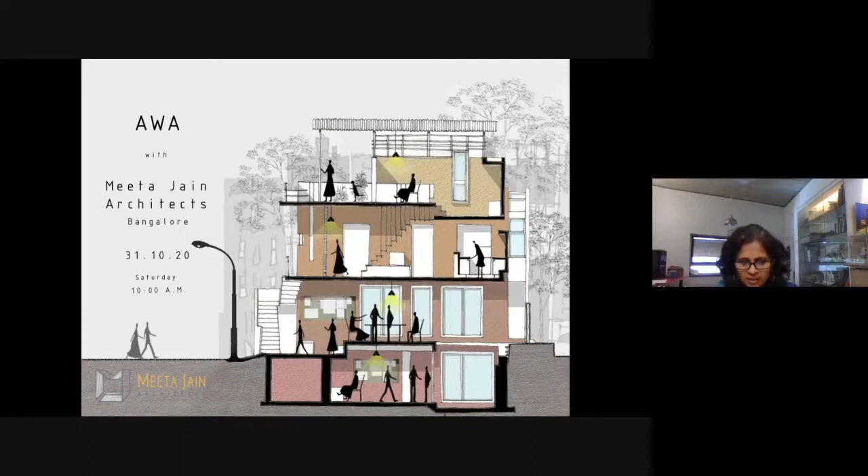Some of the driving questions for us in the practice, I think, have been about how inclusive can the spaces be, more than the materialistic or stylistic aspects. At the heart of it is how can whatever we design, create or organize allow people to meet more than they are intended to, more than is deliberately required? How can we increase chance encounters within the organization and also of the building and the outside world? The idea of architecture being a vessel of energy exchange between humans is an aspect that continues to fascinate us.

This quote by Khalil Gibran, 'Let your home be a mast and not an anchor,' pretty much expresses the spirit of what this home aspires to be. I feel a lot of deep gratitude to have had this opportunity to design a home which life presented to me, which is almost like a dream space, where really one's spirit has not felt anchored or held, but has been an amazing space of exploration — open to family, friends, extended family, guests — where I've met actually the most amazing people. So in that sense, it's really worked as a mast.

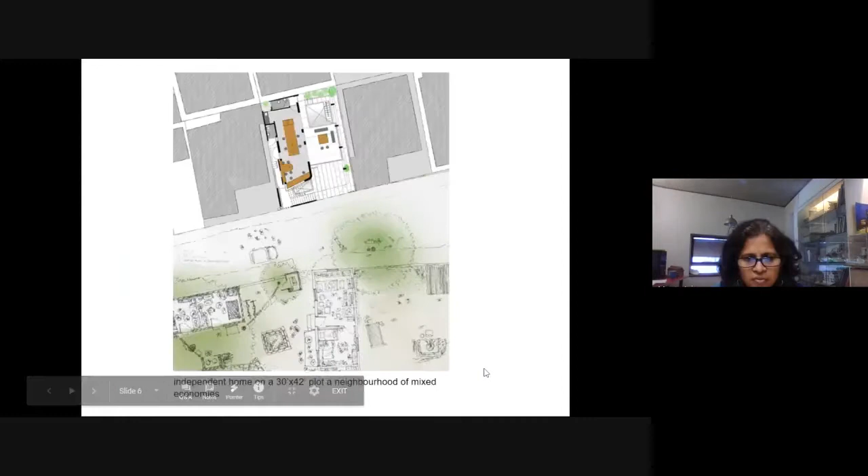The facade is modulating in nature, like the front facade by the use of louvers. And then, of course, the finished versus unfinished in terms of interior surfaces is also at play.

Now, coming to the neighborhood, right opposite the site there is a little community of vendors, which is actually a disputed property, so the owner has let it out to a vendor community. I really call it a neighborhood of mixed economies, a middle class or low middle class kind of neighborhood, which actually makes it a very interesting site in many ways in the urban context.

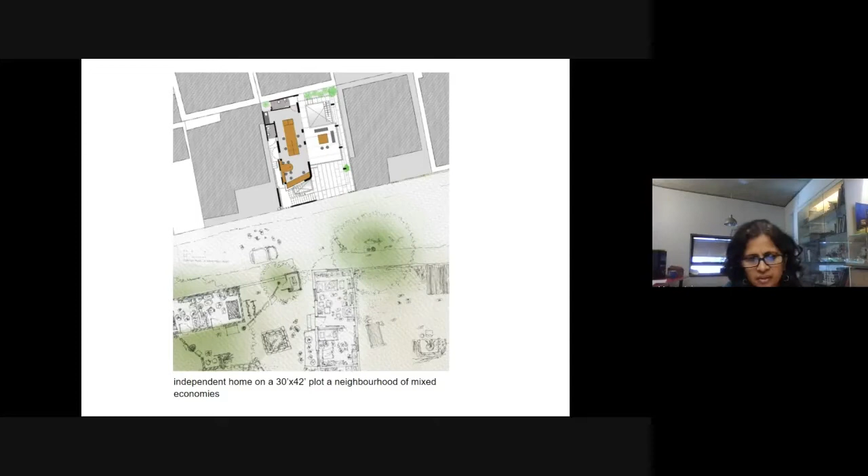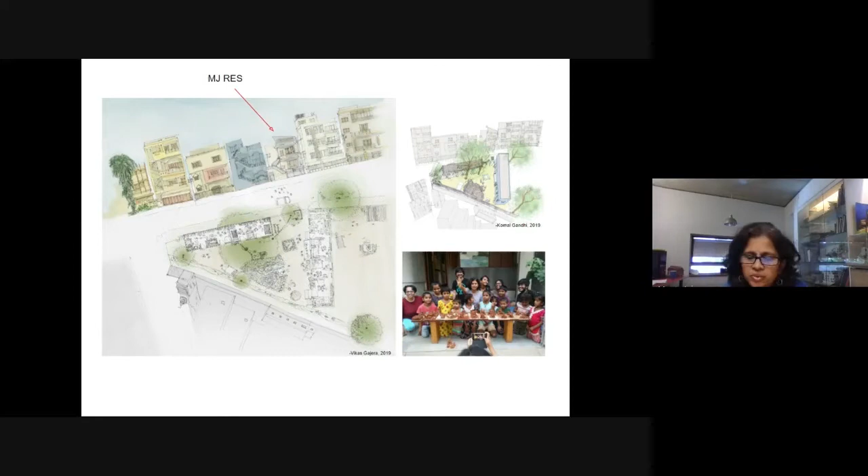These beautiful drawings were done by two interns, Komal and Vikas from CEPT, who were here last year. As the picture shows, there is also this aspiration to engage with the children of the neighborhood, whose gate is right opposite ours. So this is a little Ganesha which was made with these children; the gates were open, so we used the front yard, and a lot of these children are Muslim children, and it was just interesting to see how there are absolutely no boundaries when interacting with children. So you will also see me constantly talking about the use and imagination of spaces along with architecture, because that forms an integral part of our work.

The other thing which consciously dominated the crafting of this building was how ungated and open the facade could feel in a neighborhood which is gated, as you can see in the buildings on the left and right with their obsession with grills and more grills, where security concerns dominate.

Whereas in this building, we chose actually not to have any grill in the front, because my view is that the thief never comes from the front. But at the upper levels, we do have grills where there are possible places to hide.

So essentially, at the form level, it's a pavilion and a box, a duality. And the same duality is expressed across all levels, as you can see. There's a basement, which is the largest space, where you can see these two columns.

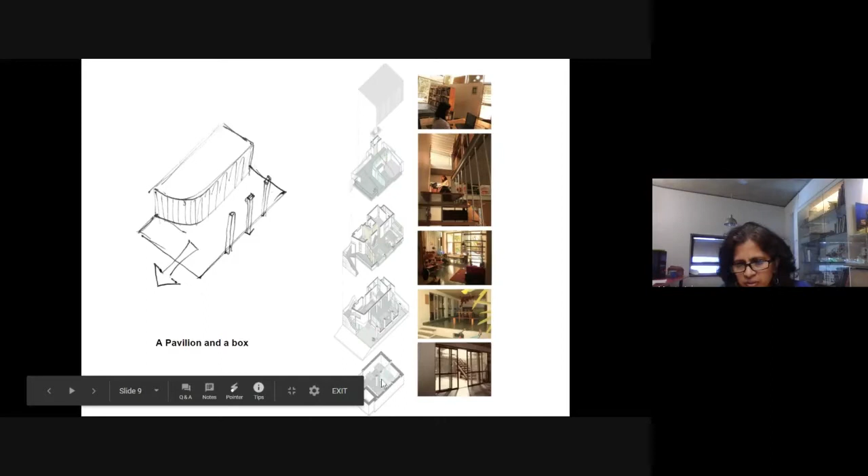And then at the ground level plane, it is completely open, and the box is towards the left side. The same thing continues at the first floor level, and at the second floor level it reverses. The pavilion stands out in the terrace, so the box becomes a void there.

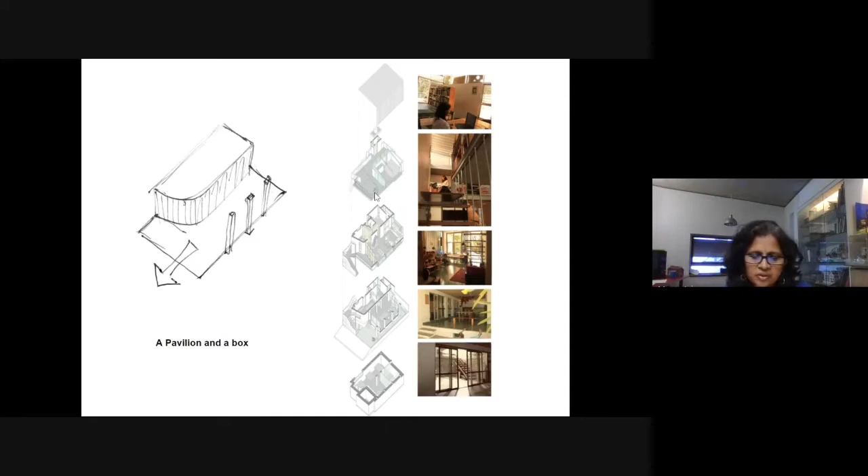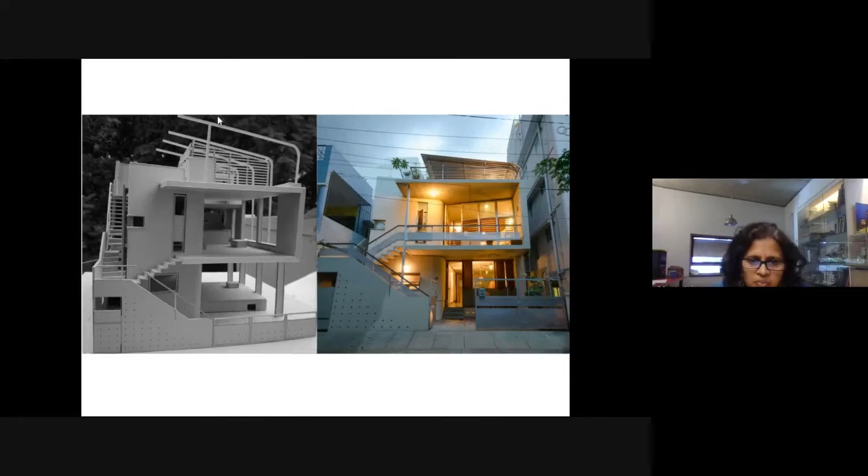As the model shows, the sheet roof, which is actually the secondary layer of the pavilion, comes from the top, takes a bend, and rises and falls in the living room space. This has been removed to show the pavilion-like nature of the model, and then just the columns continue down.

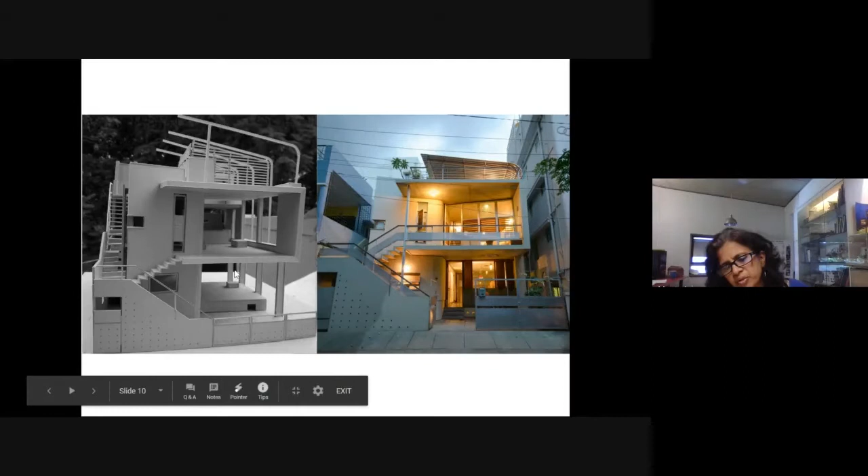This left side picture shows how the building was originally present. At the ground floor level, there was an open volume right from the beginning to the end of the site. Later on, this open space got built, and it's the present day office where this is a design office where we work out from.

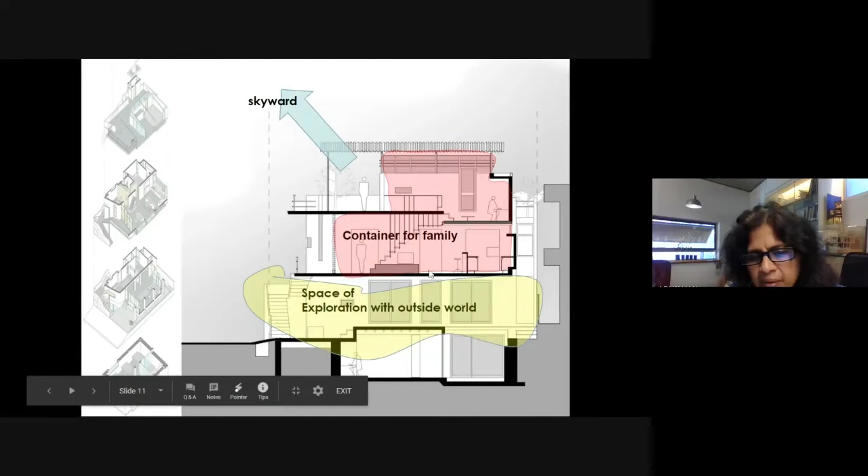Yeah, so this section explains the same thing. The bottom two floors are for exploration, and the upper floors are a container for the family, and there is a dominant skyward connect.

Having said that, I think the great shuffling of spaces happens because I have the privilege of working, both a privilege and a constraint of working. I've been a single parent, managing family and just multitasking. Earlier, my parents were here, both of them, and they passed on, so this really allows me to attend to everything very efficiently.

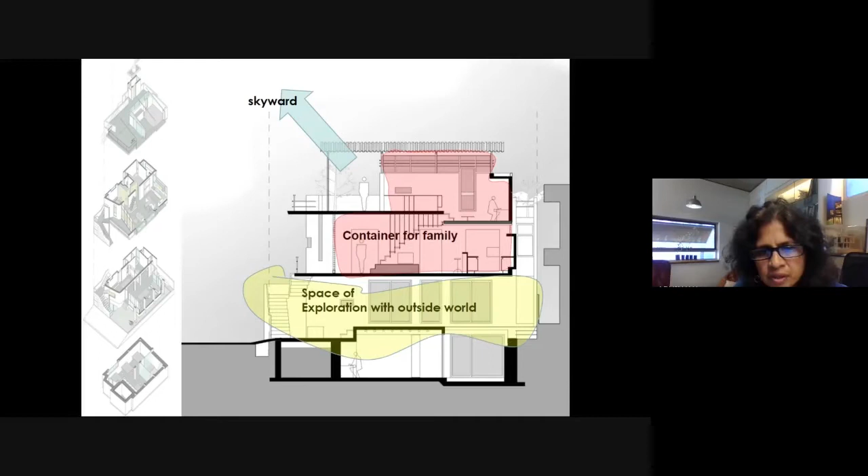So this ground floor is completely open, and only the box. The box is also kind of softened.

So the site was not a perfect rectangle, and what happened was that kind of oblique allowed for the staircase to fit in, and also gave rise to this angular wall, which at the upper level invites the user in. And what I want to point out here is also that the setbacks have been used cleverly in the sense of extensions with metals.

The top left corner was allowed by the bylaws to get occupied, so we've put in toilets there and staircases and little balconies. Even the living room projects out into the setback space, which allows for using a temporary material. So I said, okay, since I'm using the temporary material, a little bit fudging with the bylaws is okay.

As you see, the house totally orients to the east. There is no view to the side at all. And at the back, there are some openings through the kitchen. So the living and kitchen bay is one, and then there are two rooms here with a toilet in between. And then the third room is accessed through the staircase, and then a whole lot of terrace to be used.

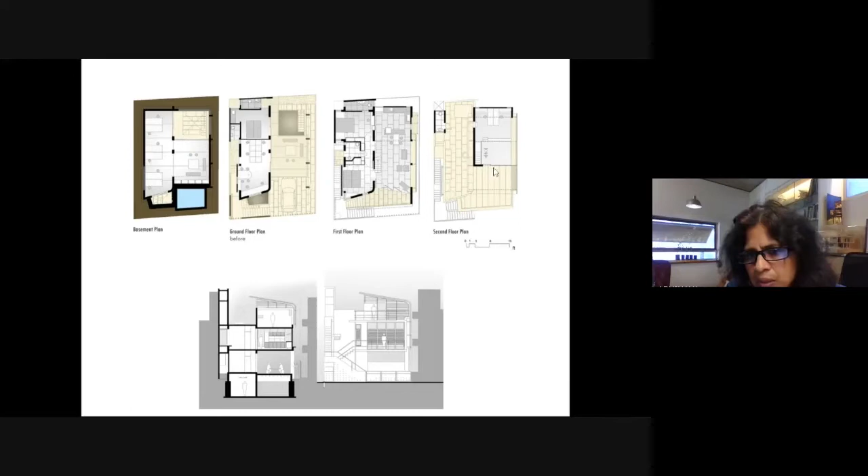So I began by putting the office here, which wasn't the original plan, so that I could just live between first floor and second floor and not need to go down and spread out myself. So the initial office was in the upper floor.

So as you can see, this picture shows when the office has moved down, but further I'll show you how it was earlier.

The compound wall becomes a very important element in most of our designs, where just by raising the wall and including the landing, a lot of—like below this wall, there is UPS and there are a lot of service areas at the same time. So how one can use each and every element effectively and tuck in things without wasting space.

And opaque and openness again. Also finding to what degree can one engage with the kids opposite, because once the gates are open, they just want to run in, and you want to engage, but at the same time, how do you draw balance? So sometimes we do engage them with these kind of activities.

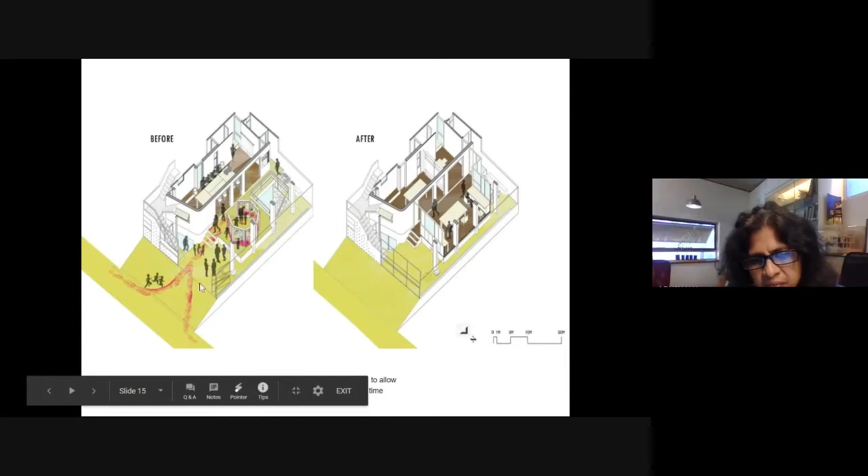And so I want to show you this thing, how the space changed. Earlier, it was the street came in, and we have used these spaces for exhibitions and many different activities. And then from there on, you could go down and access the basement through a courtyard. Subsequently, the space has got enclosed and become the present office where we are sitting right now.

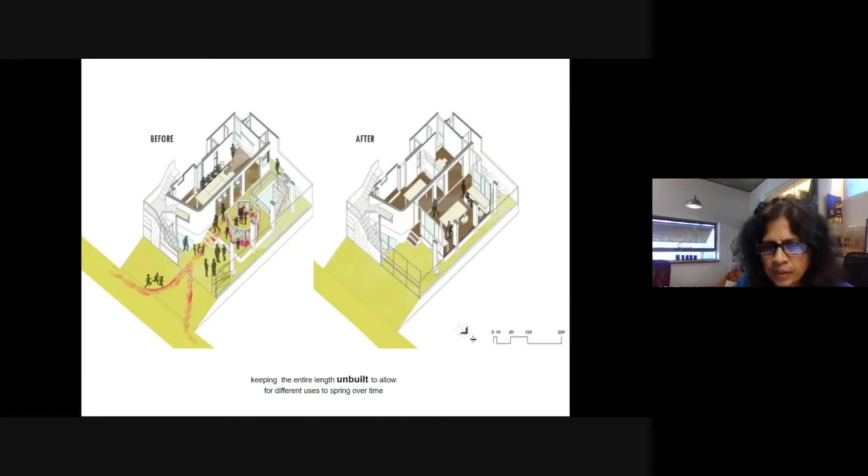The office space also expanded. So this is the earlier version, from 2008 when we built the house.

We had also run a shared co-working space called Protospace with another artist called Prayas Abhinav, who came up with this idea. So two floors, ground floor and basement, was functioning as Protospace. And of course, this kind of a play space. And sometimes we had this exhibition.

This was a very interesting exhibition we had on imagining a temporary space for Bangalore, designed as a temporary exhibition. Like it's a pop-up exhibition, and it's got this playful pivoting panels scaled to the height of a child, so that's another way of making the places inclusive.

So how can children be part of these kind of exhibition spaces? As you can see in these two images, how the space has changed from being open to enclosed, but somewhere the character of being the pavilion is retained by the way this enclosure is built. So on top, you can see the railing going towards the basement courtyard, and here you see the present design studio.

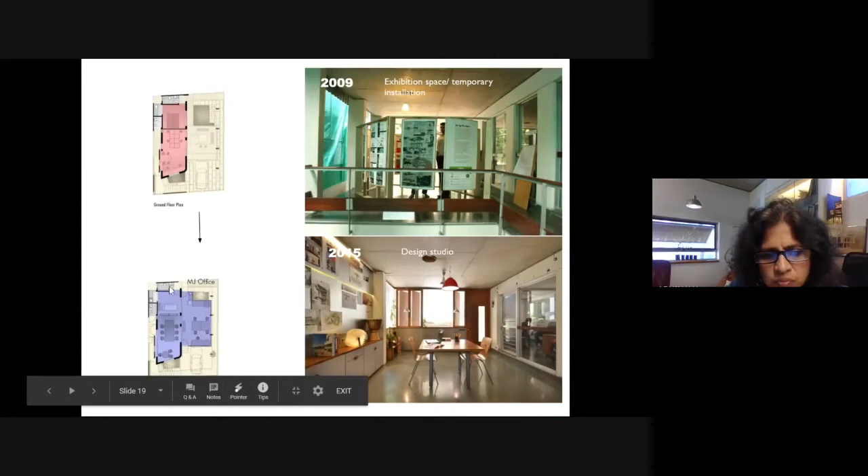Since I'm always aware that life is changing, in case one has to shift the office out, it should be possible. So this space was made in a way that tomorrow it can become a two-bedroom house, with two toilets, two rooms, living and kitchen. The counter is already integrated at the back. So the whole house can be either a house or entirely an office, without the character dictating it to be a certain way. There's that openness available.

I also want to share that this particular walling system was made with lightweight material. It's a dry enclosure system, meaning no masonry or wet cement work was used, and it was popped up very quickly. This was also a demonstration and an early experiment for me, engaging with the fact that if we were to build houses in Bangalore, how could one do that using just metal, bison board, cement boards, and wood in this case.

Within the meeting room we also have light movable partitions; this partition has shifted places three to four times, made of recycled pine wood. The side two doors swivel open, so you still maintain the continuity of the volume by opening that. Beyond this is a private guest space, and people can use it for sleeping, but this is part of the office.

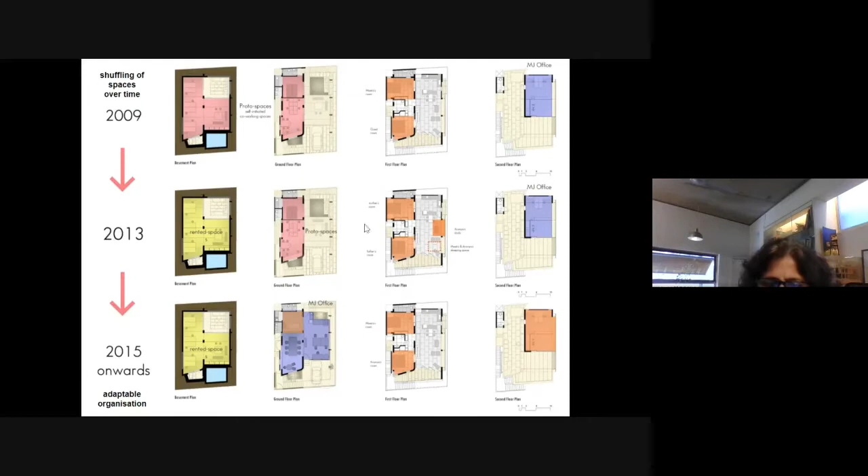So it was very interesting how the spaces have seen that multiple use, and each and every space, I cannot feel that any space is specific in my house.

And then eventually in 2015, actually my mom passed away, and before that, luckily she got to see this office space below, we had just created this. And then now we have more space. We have three bedrooms, and of course the upper space is double leveled, and it gets used in so many ways.

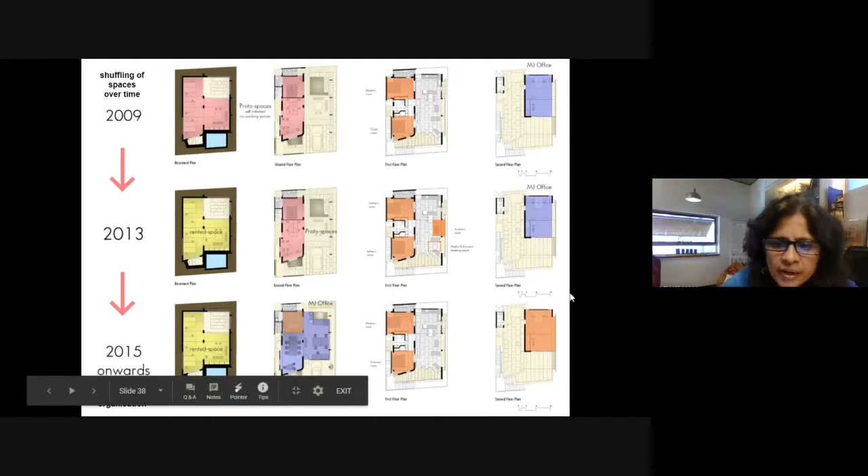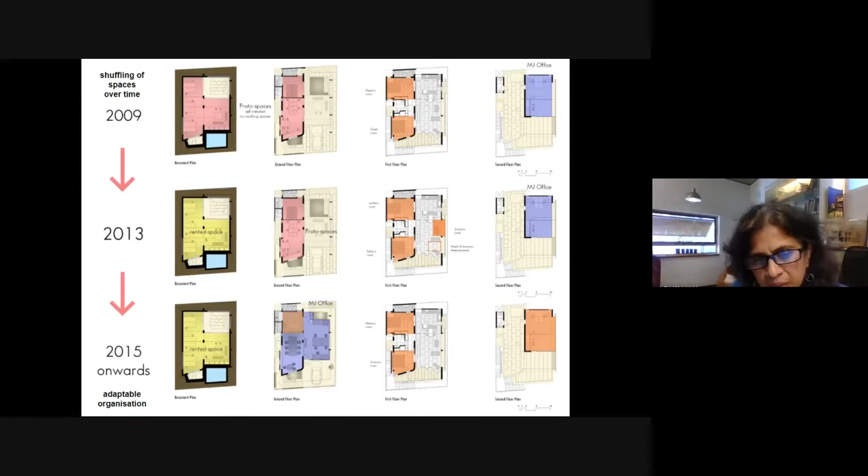So the kind of obsession with having multiple doors, multiple entrances - tomorrow I feel that if I have to invite housemates to live in this house, and how each one can have their own private space, it would be very much possible. Or tomorrow, if I move out and if this whole building needs to be converted into an office, it should still be possible.

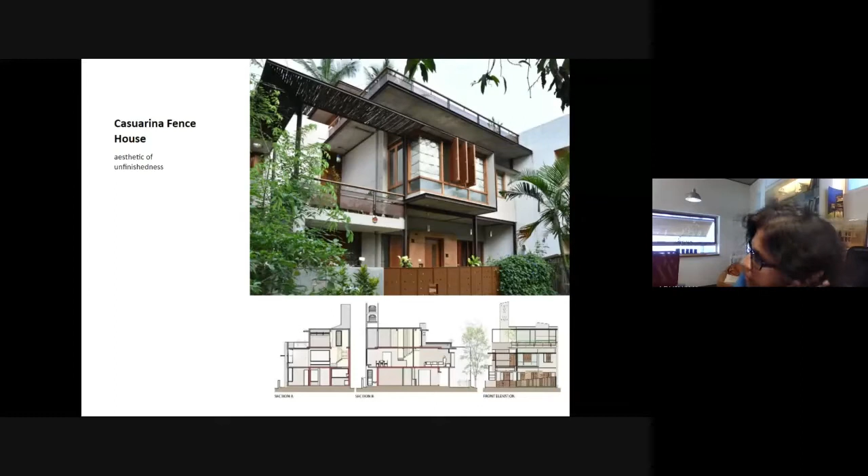I think from this project onwards, a little bit of earthiness started entering into my work, where color, the use of mud, actual mud or color of mud, and metal started being more rustic, more plain and not painted, unlike my own place. So there's been a natural shift in terms of palette. Also, clients often want something not as bare and simple as my home might be for them, so this was our way of including different materials and yet staying true to the approach.

This was a renovation project, and the upper part is totally a house built on the extended structure, hovering again in a way that the garden below is maintained. Even if you're building more, you don't express it, you stay light and you don't make it heavy. That's the idea.

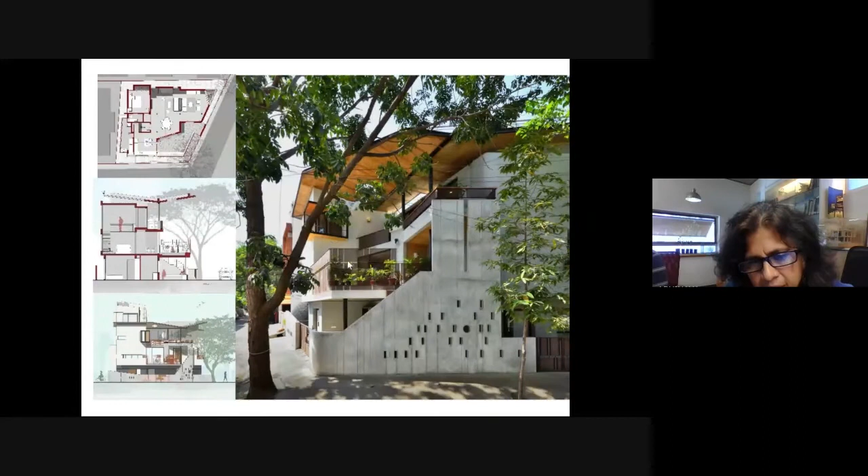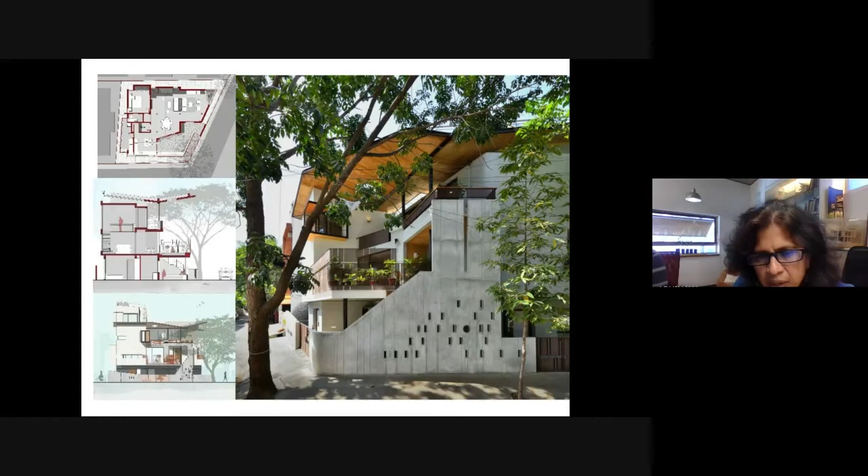This window here, we used to call it the Juliet window, where you can step out and sit, so it's like a window balcony. Some of these elements, even the circular skylight, are there in most of our projects, which continues to animate the work. Some interior images show again the inclusion of outdoors into the indoors.

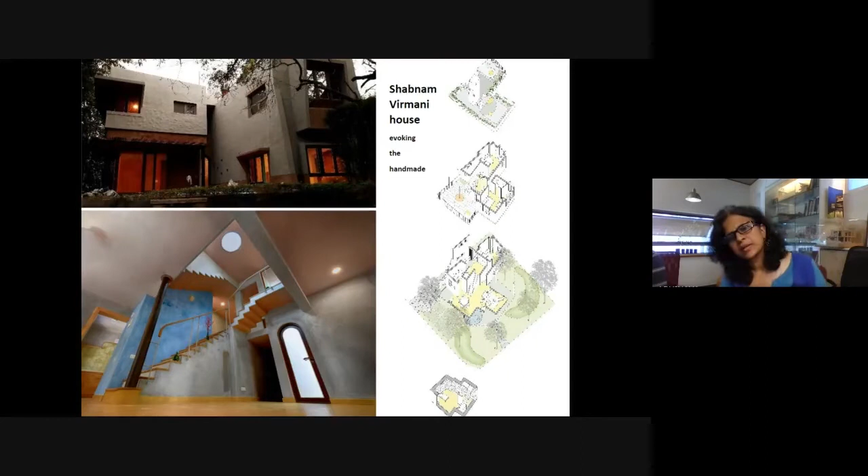This is a house we also finished early this year, for Shabnam Virmani, who's a filmmaker and a Sufi singer. The drawings are unfortunately not clear, but this is again a very different house. Her brief was that the house should not look contemporary in any way, and her constant engagement meant I feel I really co-created this house along with her.

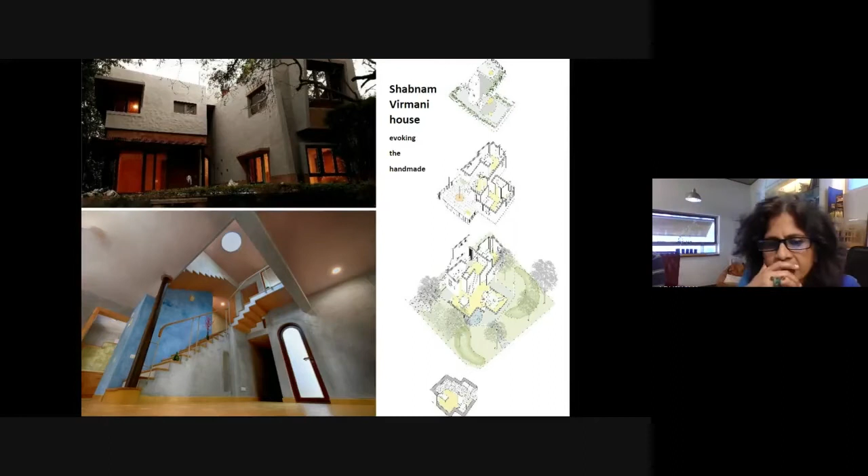But at the same time, not losing the essence. As you can see, the principle of rising upward movement is expressed in the living space. This is the only house where the skylight is literally the center of the house. The client was excited to discover that her house had 9 doors, and the 10th was the skylight—just as the human body has 9 doors, and the 10th is on top of the head, which is the spiritual center. So in her own way, she made that connection. It was very interesting to work on this house with such a passionately involved client.

As you can see, the surfaces inside turn very unfinished and rustic. A lot of mud and grays are coming in, moving away from the very contemporary. I myself discovered a lot of new ways of treating surfaces in this project, which I hadn't explored earlier. So I'm happy about that.

Before we close, I would like to talk briefly about this special project, which I got right in the beginning, and I think I was very lucky. This is One Shanthi Road, the home of Suresh Jayaram. If you're ever in Bangalore, please visit this place—not because I designed it, but because of the kind of home it is. It's really like an open home. It was a very unique brief: a home which said, I don't want it to be like a regular home, I want it to be open.

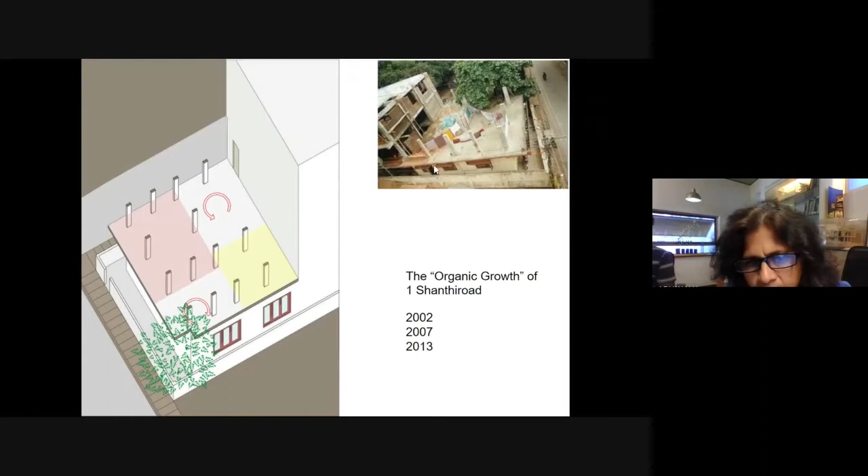I think in some ways this influenced me in making my own home. Suresh approached me with a set of old grills, doors and windows, and this was completely at the upper floor level. This house has grown over time too, but in another dimension—initially we started as a 2-courtyard house, a home and a studio. The two courtyards happened automatically because there was a huge badam tree, as you can see in the picture, and a grid of columns. This was the condition of the site when we were invited to work on the project, and the grid of columns automatically put certain things in place.

The studio and the home are again very small homes, and the idea is how do we maximize the experience within the smallness of it. That's how it kind of happened. These are lovely drawings made by interns over the years.

Then in 2007, when I had built this, Suresh came back. Suresh is a person who's very open and inviting—his doors are never closed. When you go to his home, there is food always present for anybody who walks in, whether you know him or not. He couldn't contain the effects of his own nature, and people started moving in, so he said, okay, let me make 2 artist residencies. That's when we had to add more rooms over this, even though one hadn't planned it earlier.

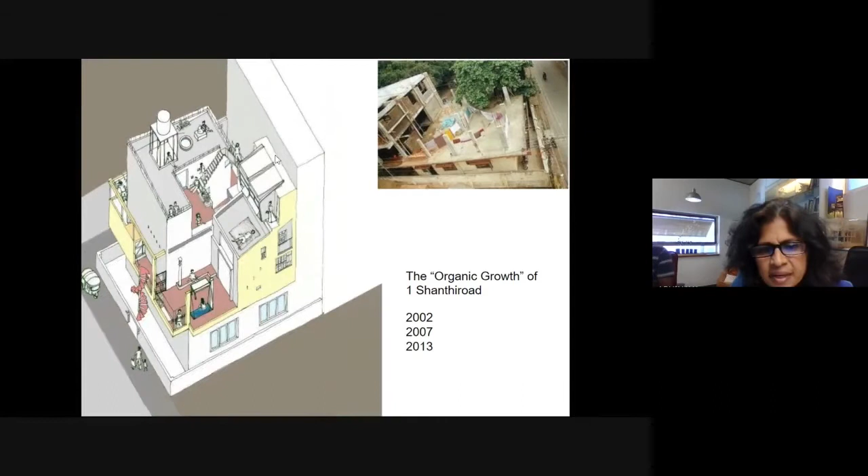The challenge was how to maintain the aspect of the courtyard at the back. So this became a hovering room over the courtyard. Then he said, I need one more room because I have no space, and this little den space was added on top. What's interesting is that just like this picture shows, it's not an exaggeration—this is how the space is actually used. If you go there on a weekend and there's an activity happening, there are people all over the place. So it's really organic and labyrinthine in that way.

So this is the original home, and this is how the life of One Shanthi Road is. As you can see in this picture, this second courtyard started getting used once it was shaded. It's always a humbling learning that in a tropical climate, if we really want spaces to be used, we have to shade them—we have to find ways of shading them. This is where everybody comes and gathers. It's messy, it's chaotic, but it's full of life. That's Suresh in the picture to the right. And a spiral staircase is the entrance to the main house.

Suresh is an amazingly open client. He just said, I want an open house and a connection to nature, and that's it. There was absolutely no interference from his end, and it was really fun and special.

In terms of languages, there are different materiality and languages, as you can see. The original house is more earthy and oxides, and then I felt it's too ornate. In 2007, I purposely made it more austere and contemporary. Then in 2013, we added 3-4 elements with this staircase, which is partly plinth and part spiral lightweight metal. All these plinths also get used for sitting when the lectures are going on.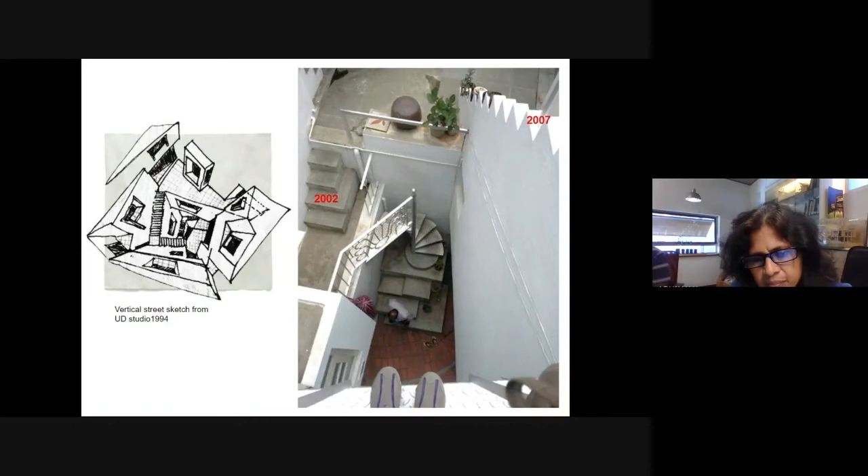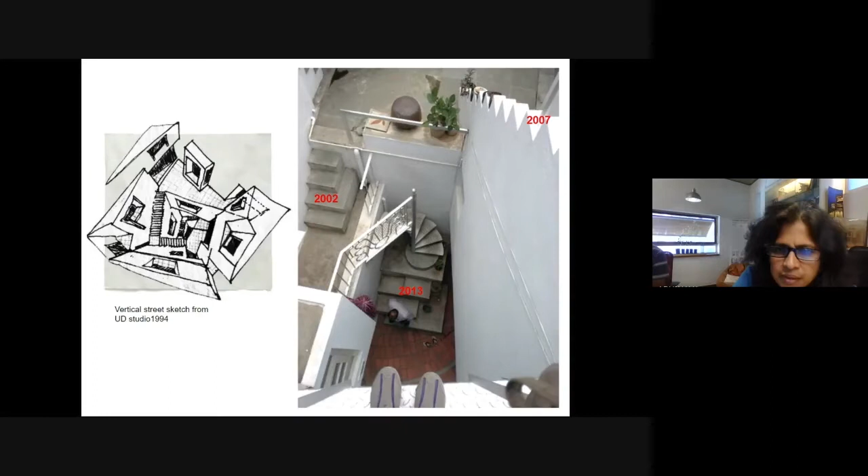Interesting thing is there are 3 staircases in this slide, but they all happened across different time periods. This kind of labyrinthine nature and intertwining does not happen when a designer designs in one go, at least that's what I have come to realize. That's been a very interesting realization, how something which grows and evolves with time adds its own sort of beauty. So yeah, One Shanti Road continues to be this pulsating home, and much to learn from that space.

So yeah, this is the last slide. I just put a few words together in the sense of how one is always wanting to play with the dualities - simple and multiplicit, street and the sky, frugality of means, which is very important because when we build in India, we have to use material very sensitively and very cost effectively. At the same time, calculated extravagance - a term I think Professor Varkey first used - is where you calculate where you want to show. For example, in my house, the facade louvers are calculated because it was expensive to make that kind of thing. But then everything else is frugal.

Functional and poetic, ascending, descending - all of it is fine, but held together by geometry. Geometry is the binding thing; none of these things should be seen separate. Ultimately, it's geometry which holds it. Geometry itself is also not seen, but the sense of people coming together is what one desires for. So, yeah, that is the end of the presentation.

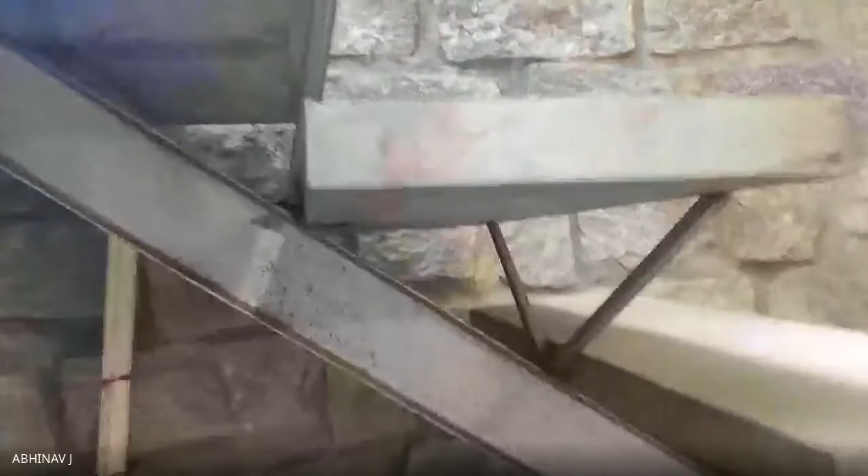Cement staircase, again, cement cast on T-angle frame and supported by a channel section here, as you can see, and each tread is held by this sort of a V connector. So this basement, I must tell you that it's only done as size stone masonry, which means we didn't do any RCC foundation. And I took a chance because it does leak sometimes when there's excessive rain, but as you can see, there is a groove all around the basement, and that takes care to some extent.

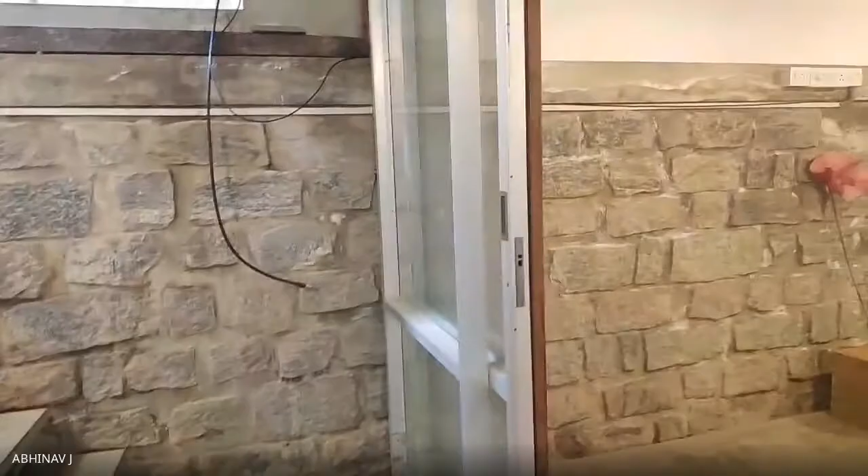And now I also had a well dug in, so in case there is excessive rain, there is an arrangement for water being pumped out. But doing an RCC basement would be more secure, but it was outside my budget, so I took the chance. At the same time, it's lovely to see this size stone granite masonry wall.

So that's the eastern entrance of the basement. Again, basement can be subdivided and used by two people, from the back and from the front.

So coming up from the basement here, this is my cat's favorite place. Sometimes they pee there in that pot.

Okay, going up now. Anything, Abhinav, here? So again, as you can see, the two staircases - the one going on top is transparent. I mean, it's interesting to see people's feet, people climbing up.

Perforated sheet is a very favorite material of mine. It's also an inexpensive way to make surfaces. Now at this junction you have to make a decision whether you want to go up to the second floor or you want to go to the first floor. So my urban design friend Himadri Das calls it that urban node.

So the idea of opening should not fixate the space, that's what I would say. It should address functionality, issues of privacy, and at the same time, it should ultimately be very simple. In this case, I have used different kinds of openings.

Most of them, as you see, are made part opaque, part glass. What I don't like is to have openings where you have security grills and then 2 layers of curtains. I just feel it becomes an overkill personally.

But then I have tried to resolve that for my clients in ways where the lightness can still remain.

Now, one of the main factors for openings would be climate. So openings need to be shaded depending on how sharp your sun is.

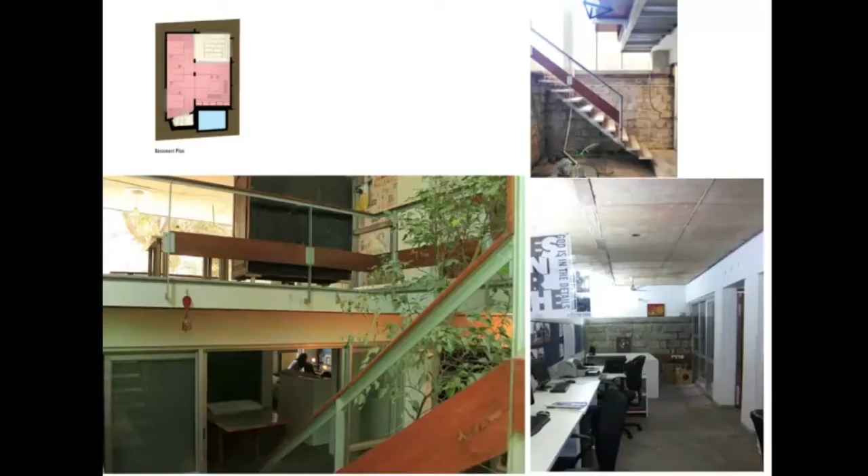Okay, and one of the staircases to the basement, the one you had mentioned about being cast in concrete, were those precast panels supported on the C channel, or were they cast on site somehow?

The one in the basement, actually all the staircases here are different, so I sent the interns to do a measured drawing. The one in the basement is a T angle frame, 35 by 35 by 5. It has a mesh placed in between, and the whole thing is cast like a precast tread, which is then welded onto an I-section and supported by two angular flats, which support the front ends of the staircase. At the back, the stringer holds it in the center, and at the front there are two thin, I think 12mm rods holding the front.

One question about this space right here by Sunaina is, doesn't the sheet of the roof make a lot of noise when it rains?

Good question. Let's walk a bit. If you see this profile of the sheet here, this side is south. What I've done is an experiment. On the south, when the south sun comes, it meets the sheet in an oblique way, so it does not heat up the sheet that much as it would if the sheet faced directly, where the sun would hit directly. Now the sun hits obliquely and the sheet goes down.

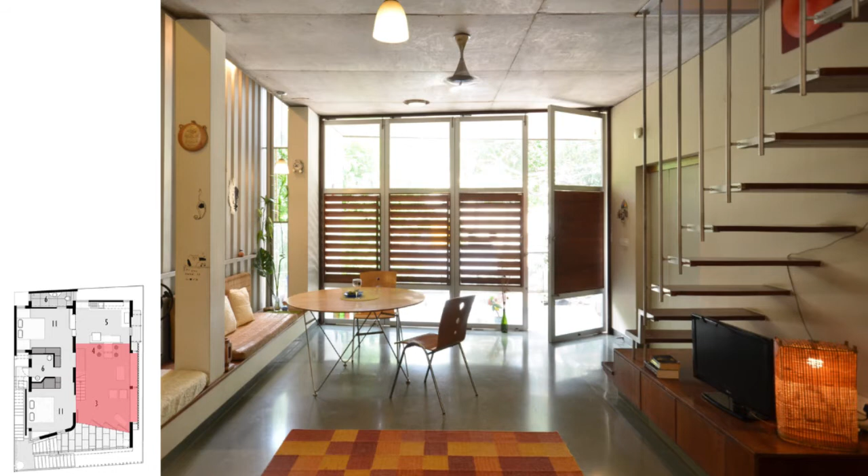The next question is by Sanjana, asking why we've used pivots instead of hinges for the openings. So I'll explain. See here, this is a hinge door. What happens is when you're looking from inside, there is never a separation, you see a hinge and a hinge and a hinge.

Whereas in the pivot, you see a clean line. As you can see in the studio doors, they stand like walls, and I feel that aids the character of the space better, that clear gap. This is a pivoted door, much neater and cleaner.

But you have to be careful using pivoted doors, especially when addressing severe conditions of climate, when there's a lot of rainfall and insects, if building in a forest, because there's always a gap left with a pivoted door at the base. But wherever I can use it, I prefer to use pivoted.

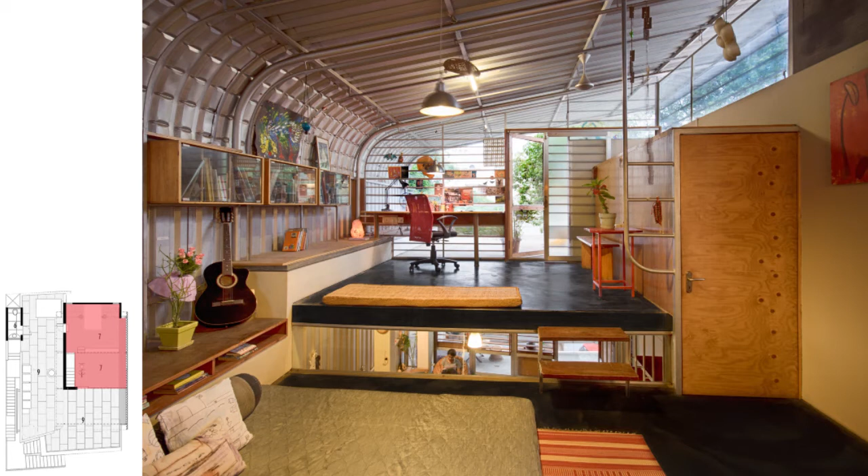Is that black colored flooring an IPS flooring in the bedroom space? Yes. Does it have expansion joints? No, this one doesn't, it's a small area. The upper part is just 2.4 meters by 2.4 meters, and here it's about 4.5 meters. Not have, but yes, you should ideally have. There are some minor cracks actually, but we don't mind them, it's a cost effective way of doing it.

As you can see, there are remnants of the old office, the table is still there, those two tables which we haven't removed. When our guests come, it's very useful for them to put out their luggage and open up their bags.

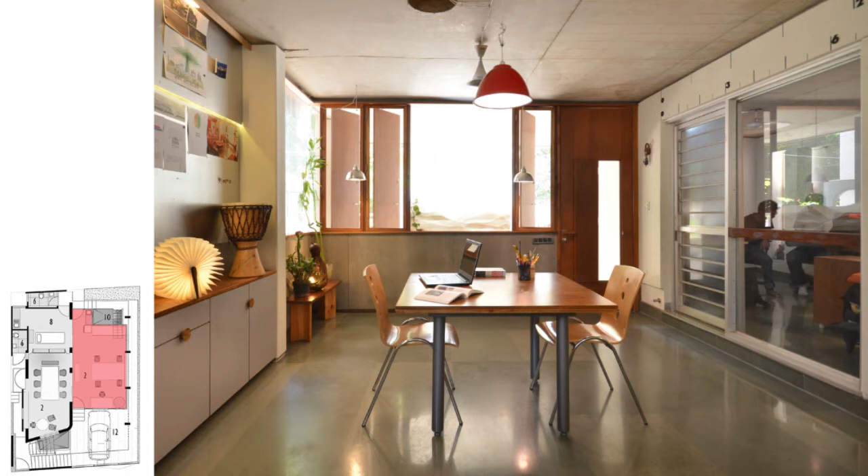One question I had was, you're using a lot of dry construction techniques, not temporary but dry. Doesn't that over time face issues due to expansion contraction of metals and two different materials combining at one place and reacting differently to climate? Yeah, so actually,

the dry work, more or less, the materials are similar. So you would use boards, metal, and wood. When you put wood with masonry is when you have to worry a lot more, because it would add cracks to the masonry. For example, if I have to make a wooden jamb, I'll show you here. Now this is an aluminum door, so aluminum has no expansion, but if I was to make this with wood, I would have to address it by giving a groove in the plaster for wood. So with dry materials, they are more compatible in terms of temperature.

Also, I think your question would come more into play in very extreme climates. I'm sure there is engineering available where the nuts and bolts are allowed to expand, but not in a climate like this. I'm coming down from this side staircase where the earlier office entrance came from.

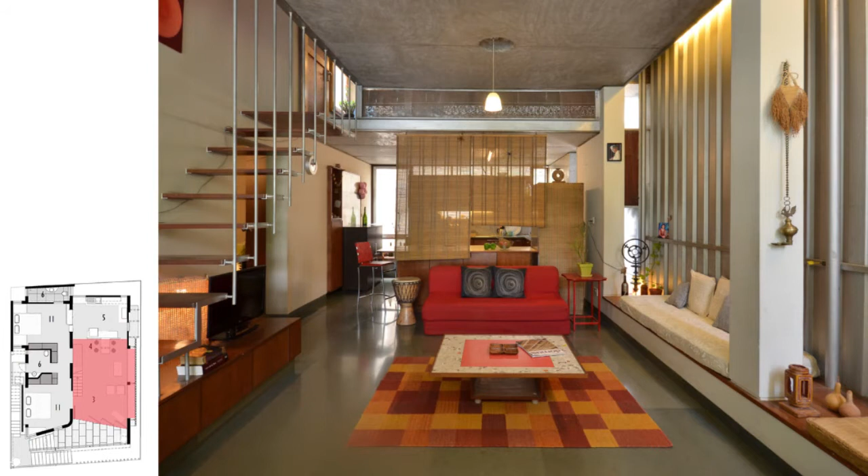I was intrigued by the staircases you have used. Usually throughout your projects I saw super light staircases, which are like an installation in the project. But what are your views on an opposite staircase, which is very heavy, robust, and massy? I haven't seen that throughout your projects.

No, it's not like that. It depends on the space. If I want to use the underneath of the staircase for storage, then it's massive. But if I want it open around the staircase, then I'll make it very light. Some of the examples you've seen are those, but it's not like I have one preference. If you see in Shabnam's house, the staircase is heavy.

It's based on functionality versus what's the space around. But when you make a light staircase with open space underneath, you have to make sure you design the spaces around accordingly.

I love the staircases of the fort, especially those narrow staircases which went up to the terrace, where you feel squeezed, and then you come up to the terrace. I love that staircase very much as well. So it's not like I have a preference for one or the other, but the idea to push it to minimum, maximum lightness, is just a sense of exaggeration that it's a staircase, it's carrying you, but it's light. That's done where there is drama to be seen. It should be placed where you see it, you wouldn't do that where you're enclosing it in a box.

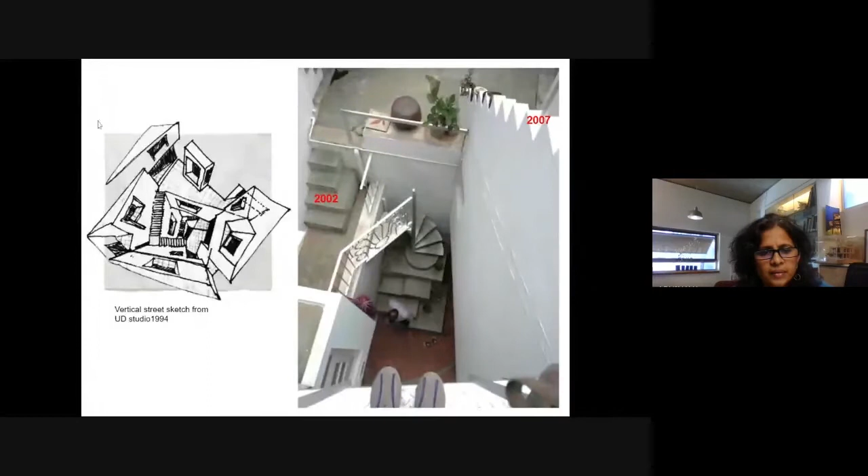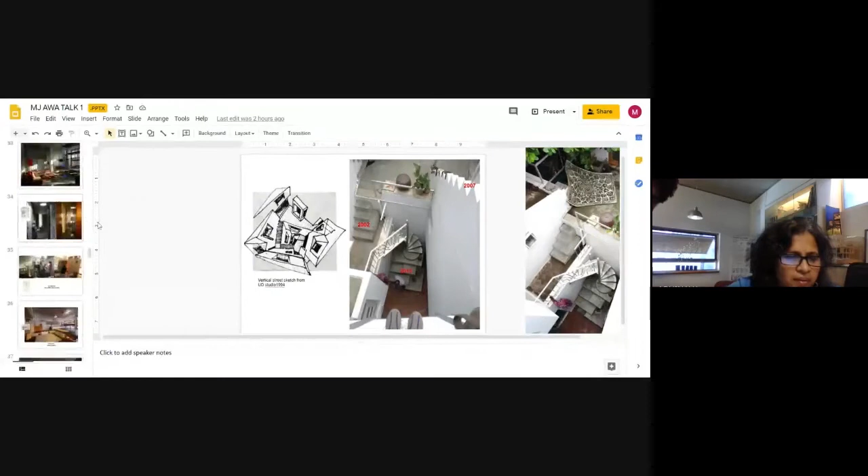I want to show the plan. Yeah, we can just go to the plan then. You can see the slide, yeah.

As you can see, there was no space to be wasted. It's a 2-bedroom house with a balcony, leaving all the setbacks. That's also why, by the way, I have followed Vastu - though I don't believe in it, but if I have to sell the house someday, it should be possible. So master bedroom in the southwest, kitchen in the northwest, east-facing entrance. That way also it works.

I had a question. When you were showing one of the other projects, a farmhouse I think, the front facade had a huge cantilever. So was that actually a cantilever, or was it just appearing to be?

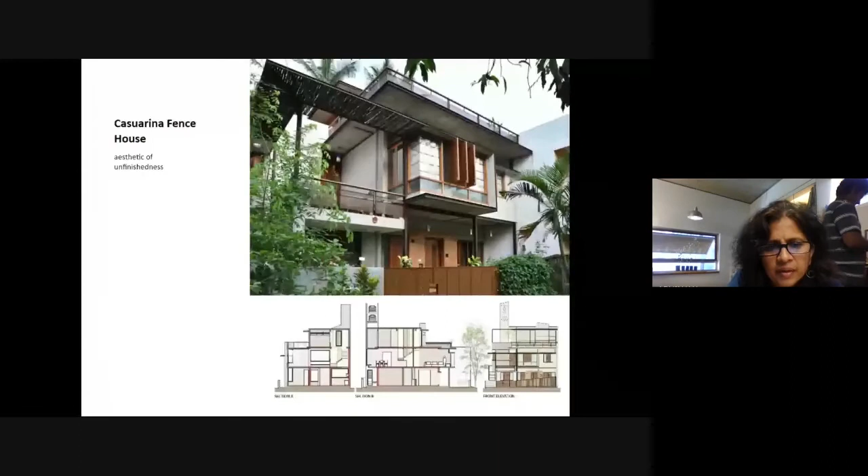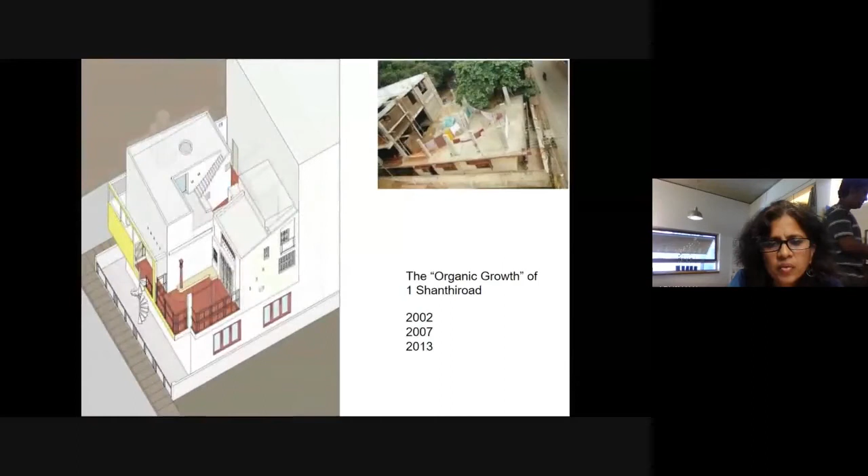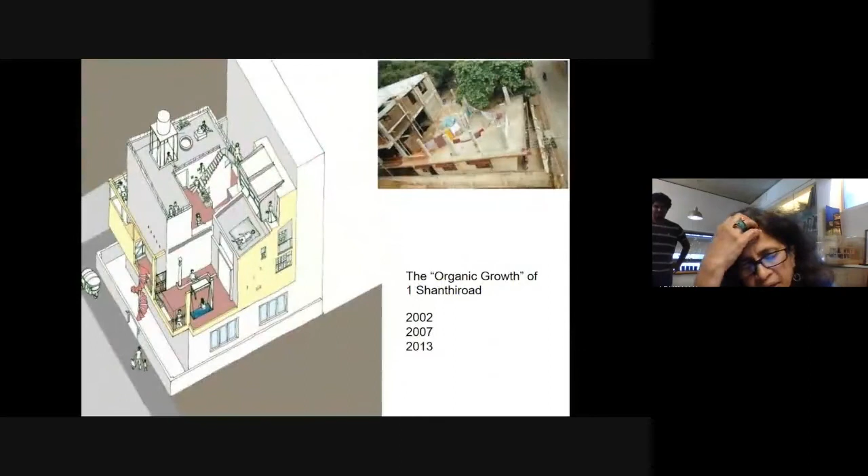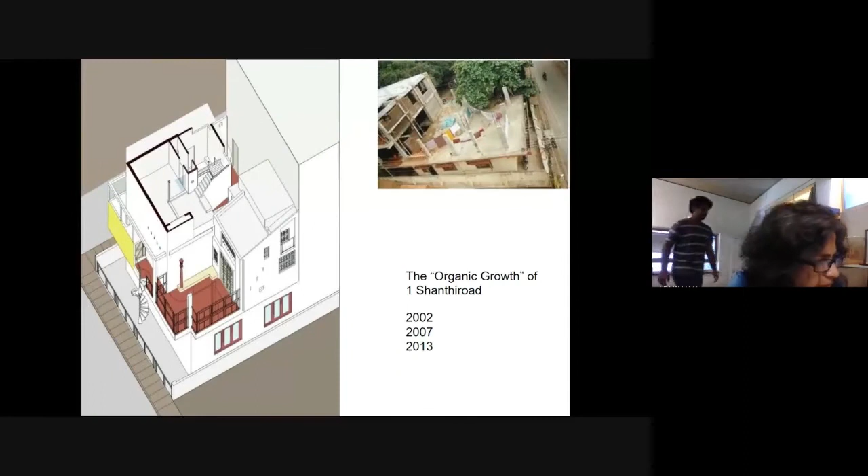I mean, the volume nature of the building. When you have this full height kind of door, it makes the smaller spaces look bigger, which is of course tried out. Like for example, in my living room, it's only 9.5 feet, but the perception is that it's about 11 or 12 feet high. So that's the advantage also, that you can make smaller spaces look bigger. But it's not like you can't introduce a lintel. Please introduce a lintel, it's about doing what you are intending to do.

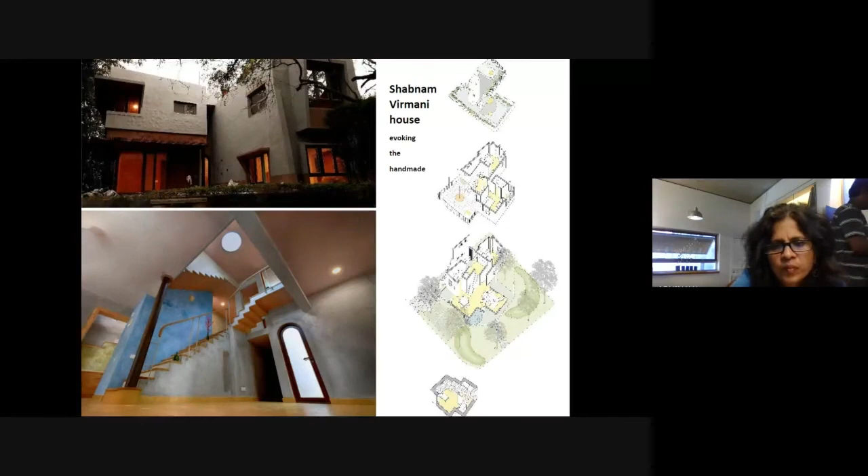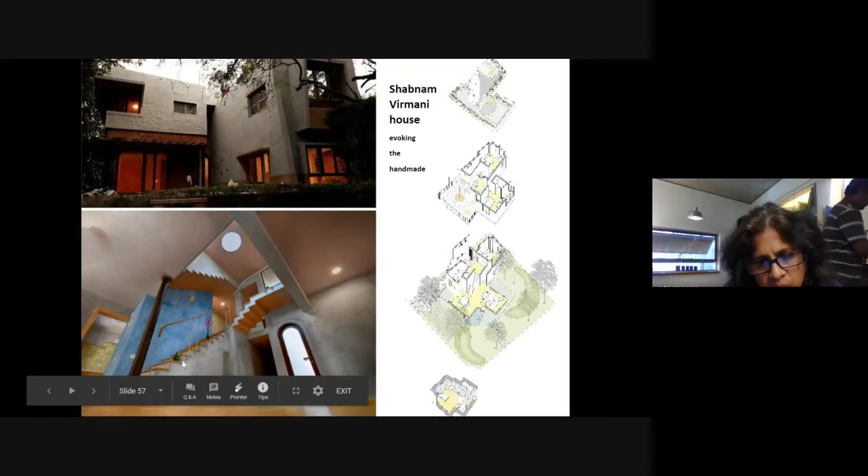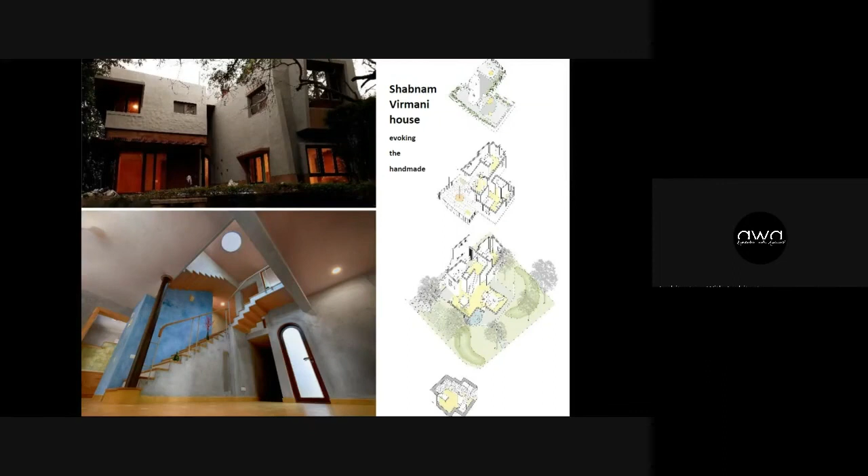Any other questions? I guess we are done with questions. Yeah ma'am, so I guess it was quite successful, the walkthrough went quite smooth. All right, thank you so much.

I had fun revisiting my space with a new sort of lens. It's always interesting, it kind of gives you new ideas about how things could have been or how they can be. So thank you for that.

It is quite interesting to see the use of materials that you have used. Many of us are doing a working drawing studio right now, so we could actually relate the things that you have used and the discussions we have with our faculties.